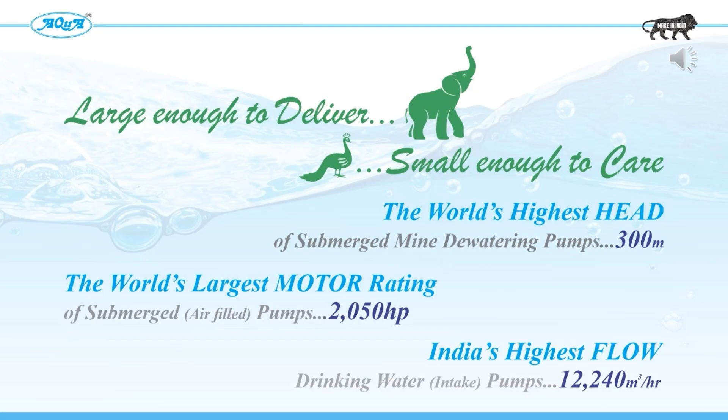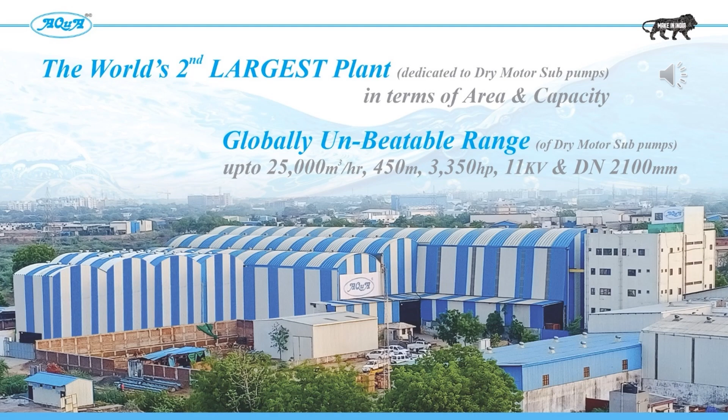Aqua has built dry motor submerged pump sets, each rated as the world's largest horsepower, 2,050 horsepower, the world's highest head of 300 meters, and India's largest flow rate of 12,240 cubic meters per hour. Aqua has the world's second largest plant dedicated to dry motor submerged pumps, with a range that is globally unbeatable.

For over 2 decades, Aqua, the largest manufacturer of dry motor submerged pump sets, has had an unmatched compounded annual growth rate of 27%. Aqua's strong impetus on R&D, competent engineering support, and highly skilled, experienced manpower allows it to offer future-ready designs.

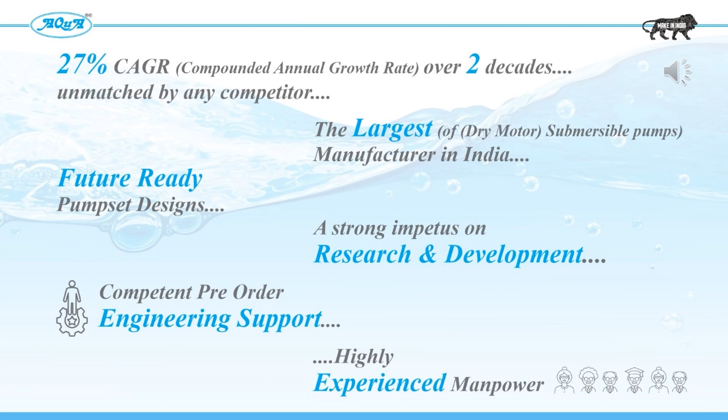Hirwar, pressurized distribution lift irrigation project on Sone River, MP. Aqua's HT submerged VT pump sets, 1,405 horsepower, 6.6 kilovolts, for raw water handling at the intake well.

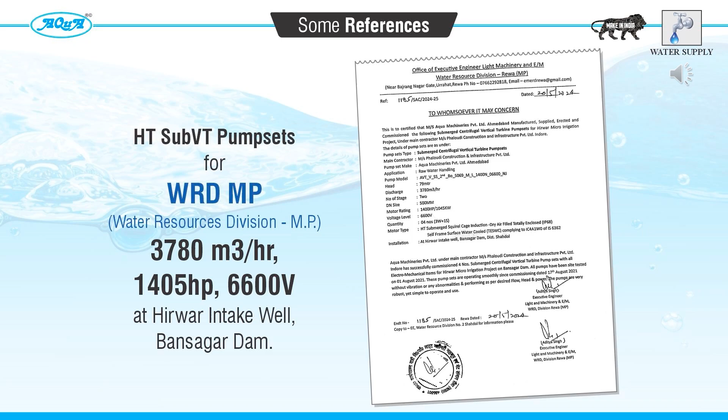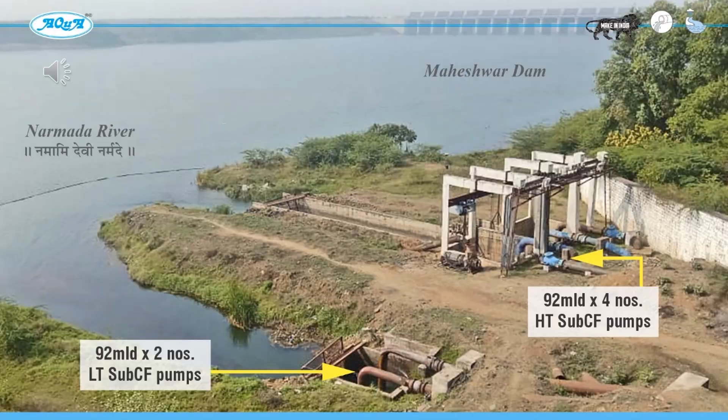360 MLD Indore water supply scheme, running satisfactorily on a 92 MLD Aqua submerged pump set since 2013, in very difficult conditions.

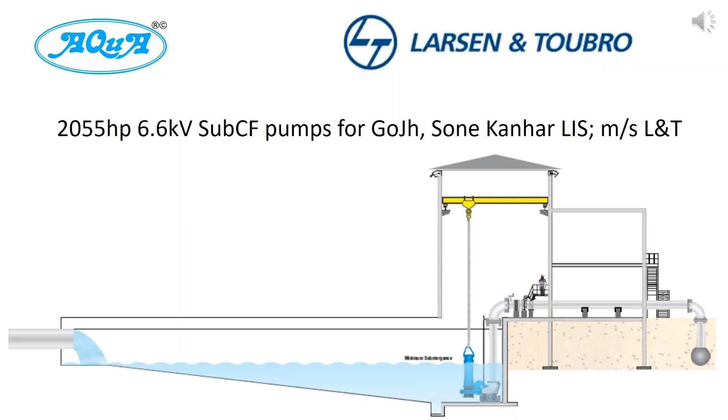Aqua's 2,055 horsepower, 6.6 kilovolt submerged CF pump sets are used at the Sone Kanhar lift irrigation system. L&T benefits from the least life cycle cost through Aqua's 2,055 horsepower HT submerged pumps for its relay pumping stations for its Sone Kanhar LIS.

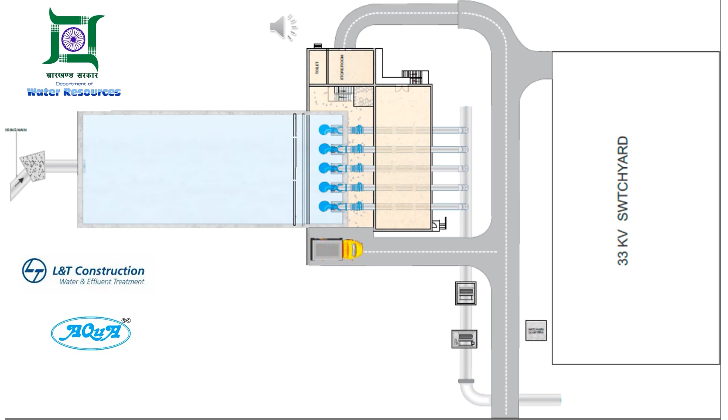To sustain 1,468 MLD of drinking water for Greater Hyderabad, Aqua designed unique bottom-rested submerged pumps.

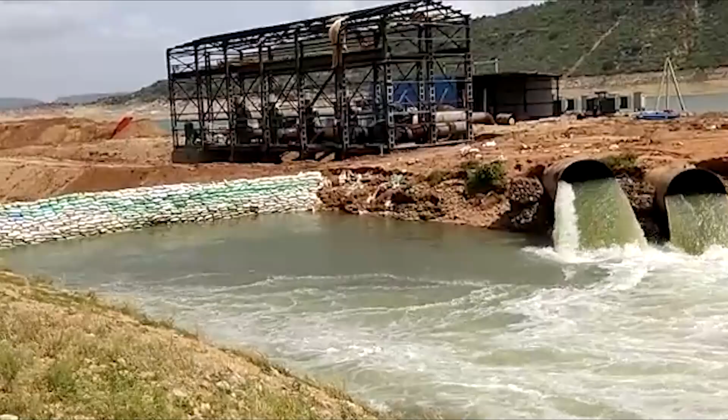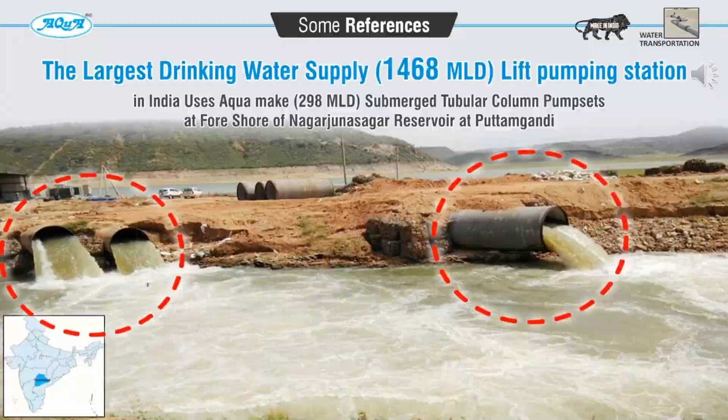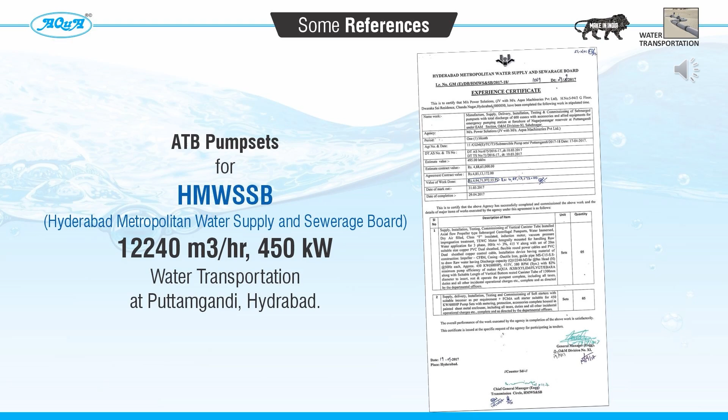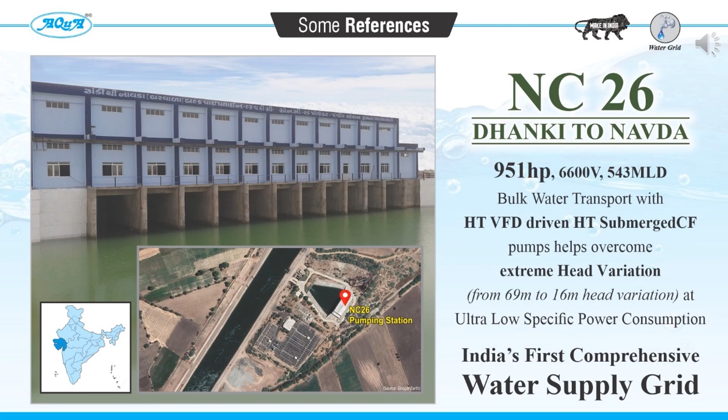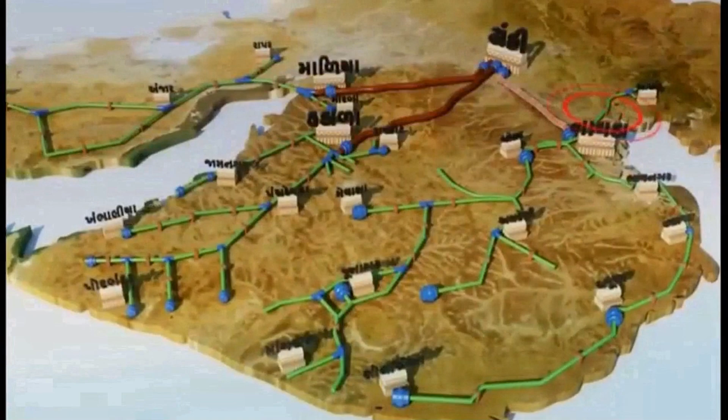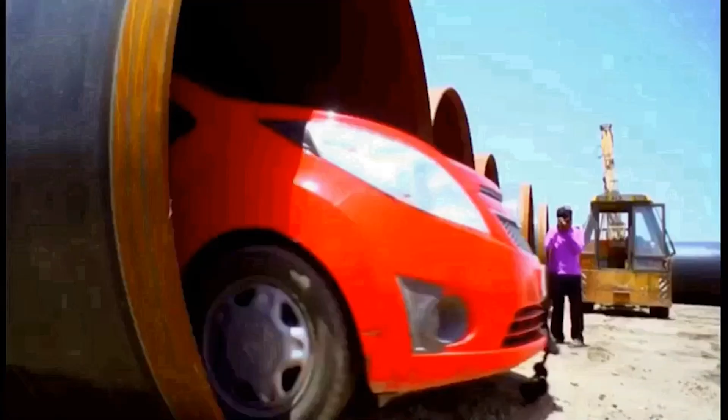Bulk transport of 543 MLD of drinking water since 2015, using Aqua's submerged centrifugal pumps, rated 951 horsepower, 6.6 kilovolt, VFD driven.

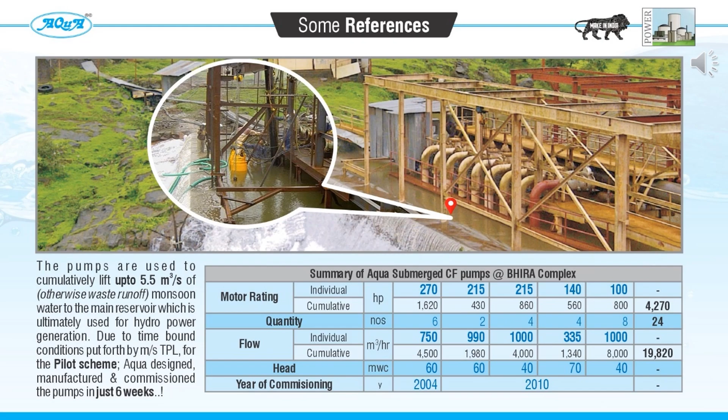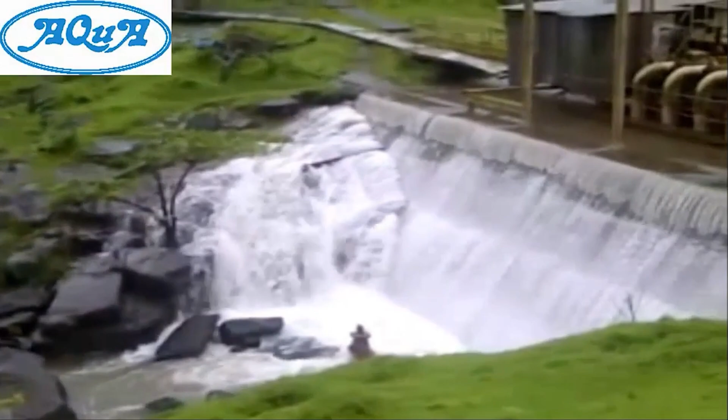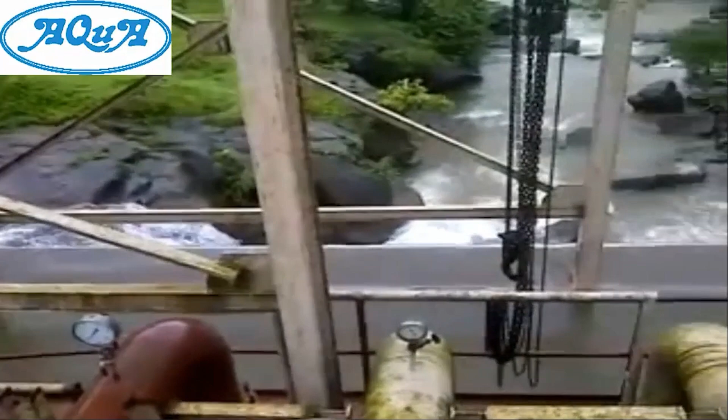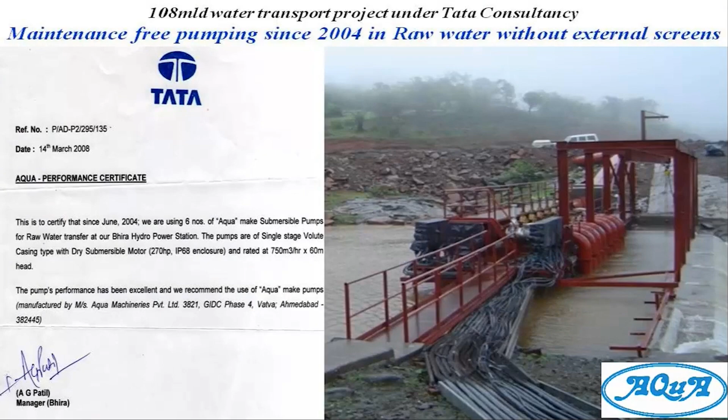India's oldest hydropower station uses Aqua's submerged pump sets to transfer nearly 5.5 cubics of raw water, and since 2004, these pumps are running very satisfactorily.

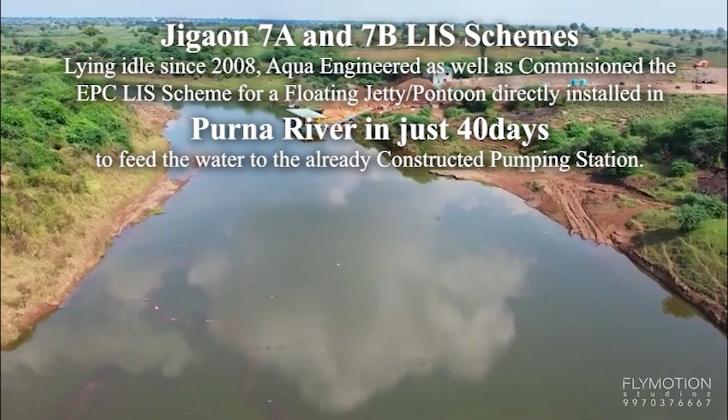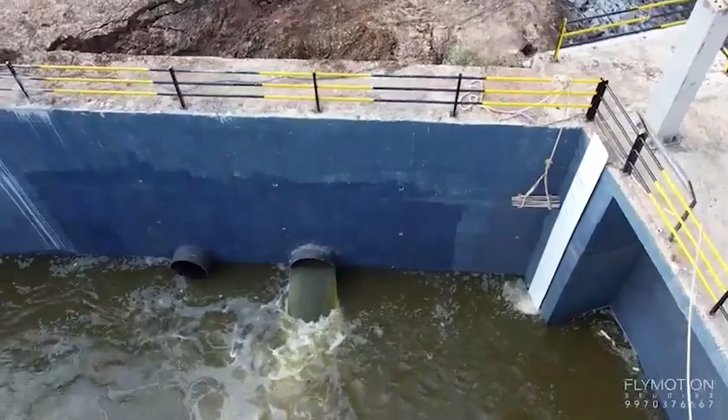Gujarat's highest head lift irrigation scheme uses Aqua's 123 meters head, 939 HP submerged vertical turbine pump sets, enabling energy-efficient lift irrigation of 28.5 cusecs at Khanpur LIS.

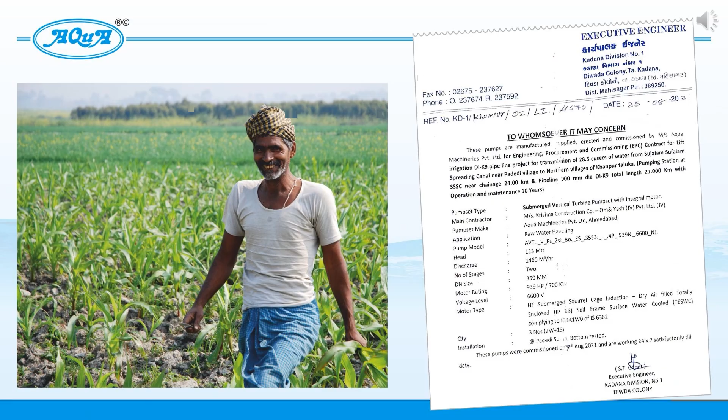The cost and land-effective 600 cusecs, 1,468 MLD Greenfield Canal linking pumping station was set up in an ultra-low time of just 65 days. It helps sustain drinking water for 2/3 of Gujarat.

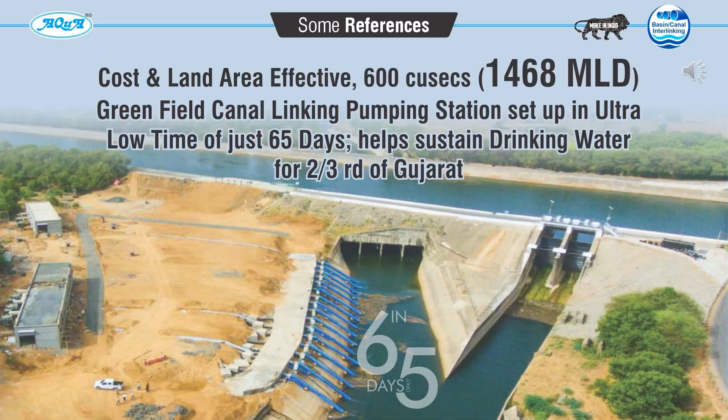Thanks to this pumping station of 1,468 MLD, nearly 4 crore people could get sufficient drinking water.

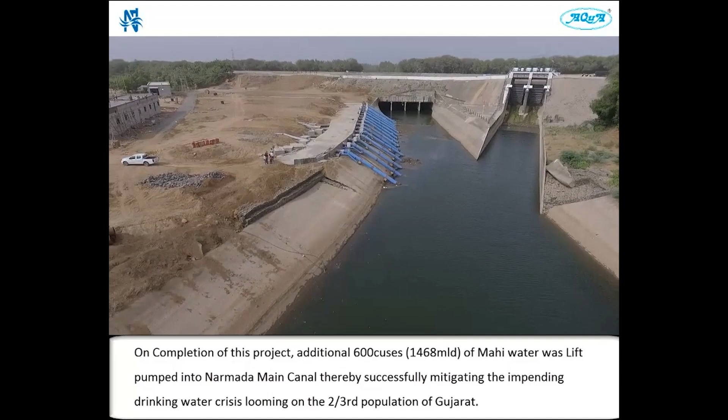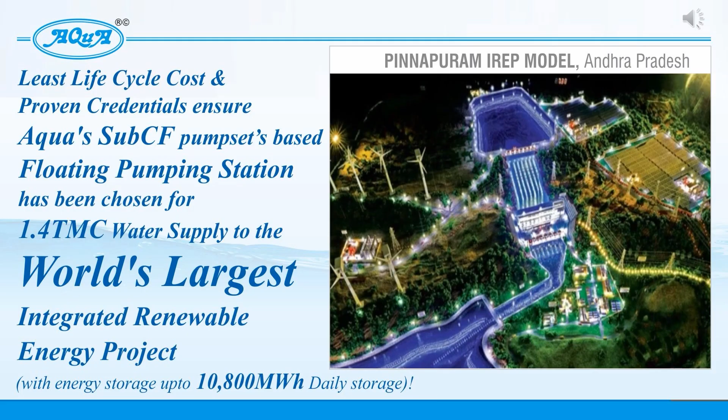Aqua's submerged CF pumpsets-based floating pumping station has been chosen for 1.4 TMC water supply to the world's largest integrated renewable energy project at Pinnapuram. This covers Aqua's scope of work for the Pinnapuram IREP model.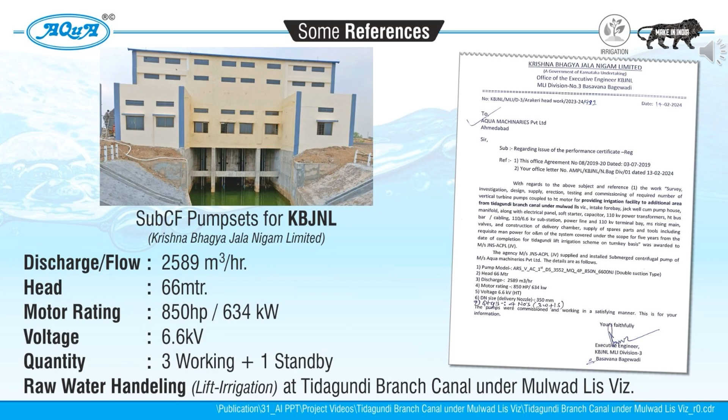KBJNL is using Aqua's submerged centrifugal pump sets of 850 horsepower with a discharge of 2,589 cubic meters per hour for irrigation purposes.

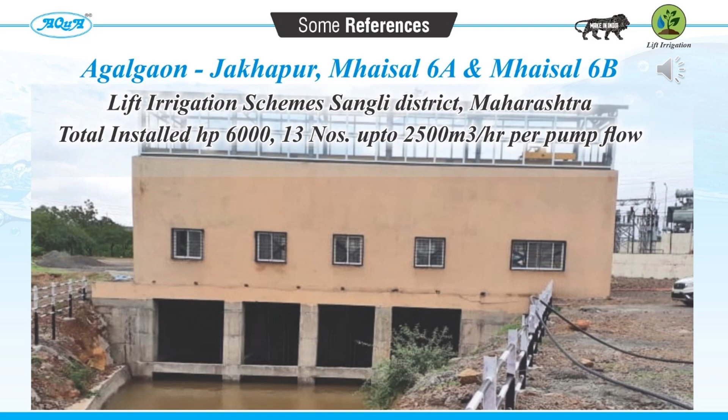Lift Irrigation Scheme, Sangli District, Maharashtra: submerged CF pump set, 335 HP, with a discharge of 765 cubic meters per hour, for raw water handling.

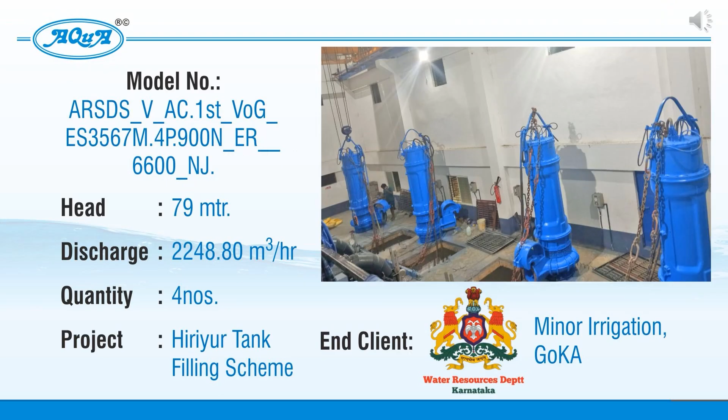Achieved head of 79 meters, with a discharge of almost 2,250 cubic meters per hour, for the Hiriyur tank filling scheme, Karnataka.

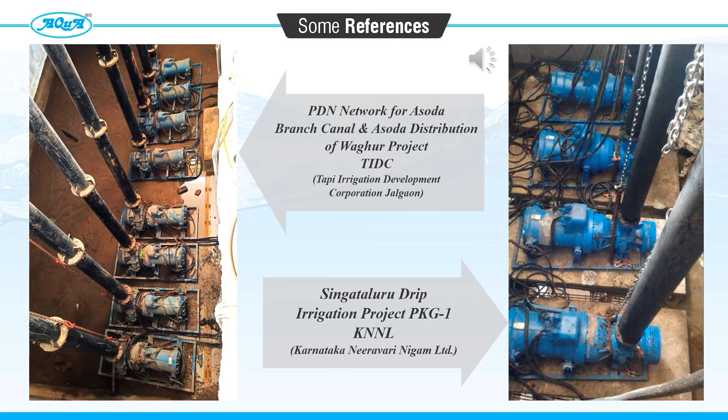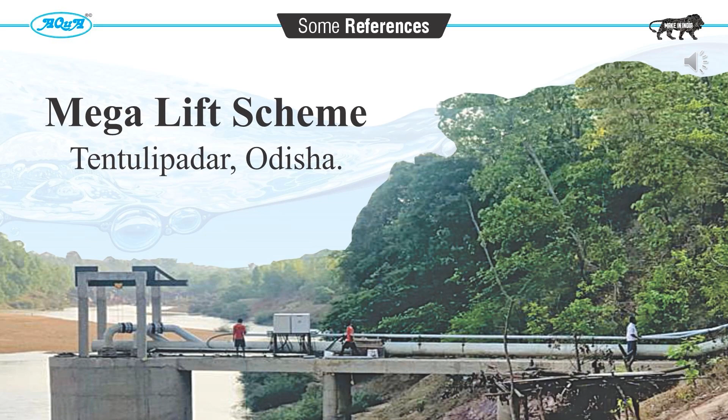Aqua's submerged pumps are used to feed pressurized distribution networks, for example at Tapi Irrigation Development Corporation and Karnataka Neeravari Nigam Limited. Aqua also supplied its submerged CF pump sets to the Government of Odisha for the Mega Lift scheme.

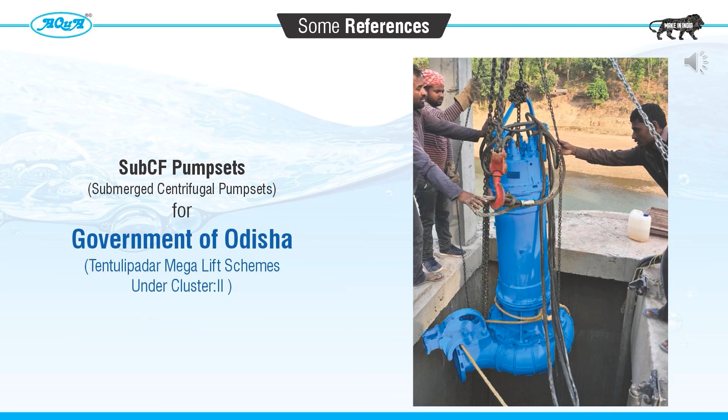Aqua supplied its submerged CF pump sets to the Government of Odisha for the Asian Development Bank-funded rejuvenation of a lift irrigation scheme, which now runs smoothly with much lower maintenance compared to erstwhile conventional pumps.

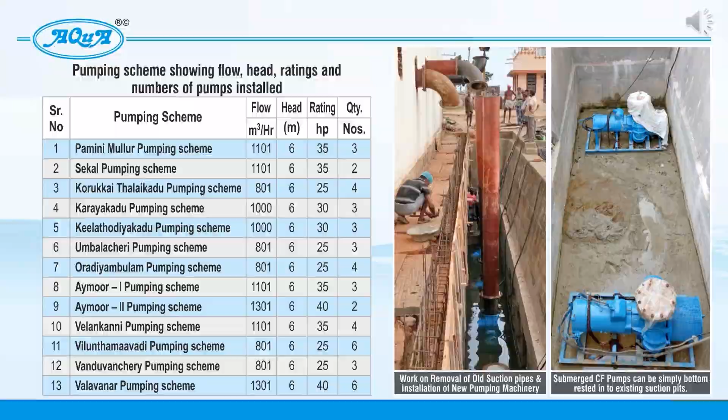Drawing on its R&D expertise, Aqua develops case-specific pumps, which in turn resulted in lowering the energy bills of the Tamil Nadu government by 25%.

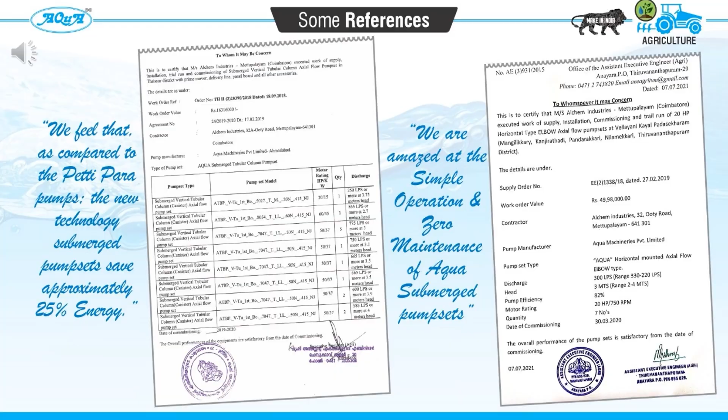Aqua's pumps have continued to amaze clients with their simple operation and zero maintenance qualities. Here is a list of some of Aqua's pumps in water resources.